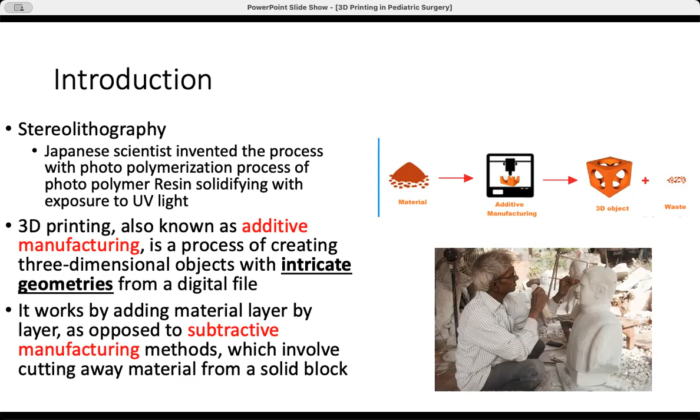So the basic principle is that you have some material, and then you add that material layer by layer and make a 3D object, so that there is a minimum amount of waste. This is exactly opposite to what a sculptor does while carving a sculpture, where he starts with a solid block of stone and then sculpts a statue out of it, which is called subtractive manufacturing. The material is cut away, and there is a lot of waste, and it's entirely dependent on the ability and skill of the sculptor making the statue. So for us to understand 3D printing, it is an additive manufacturing process where just one layer is built on top of the other.

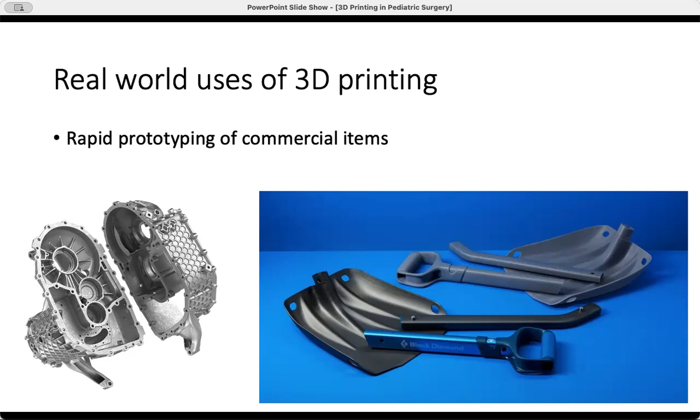The real world use of 3D printing is mostly done for rapid prototyping of commercial items. So whatever the car industries or mechanical industries are doing, whenever they are inventing a part of an automotive vehicle or some other manufacturing material, they will first make a prototype based on the CAD drawings, so they can see what all the problems are in the prototype. Then, after making the prototype and finding all the flaws, they will go on to develop the actual model with the actual material, rather than straight away printing with the actual material, which would be very expensive if they did that.

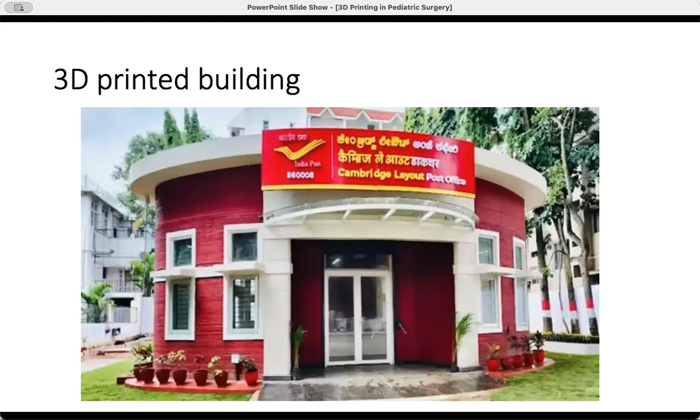Recently, you must have come across news that in Bangalore there was a post office built as a 3D printed building. What they did was take a large amount of concrete material, put it in software, designed a building, and then with large machines, they were able to print the walls and the rooms and the entire architecture into a building format which they can use. This is used for making buildings in a short span of time, maybe if something is needed as a makeshift area, like a camp, a refugee camp, or a makeshift hospital. This is being done very, very frequently now.

In medicine, 3D printing is being done with many uses. I will come to the specific pediatric surgery uses in the subsequent slides. These are just some of the examples.

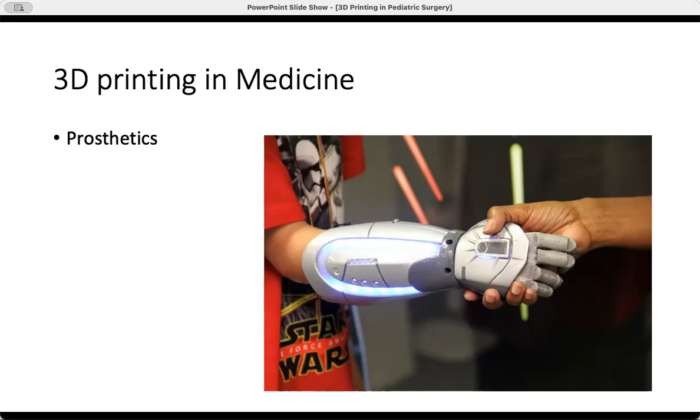This is a hand designed to look like a Star Wars hand, which was done for a child whose hand was amputated, and they designed a hand out of it. They made internal connections in a way so that he can move, he can have some finger movement or movement at the wrist, and the whole thing can act as a prosthetic.

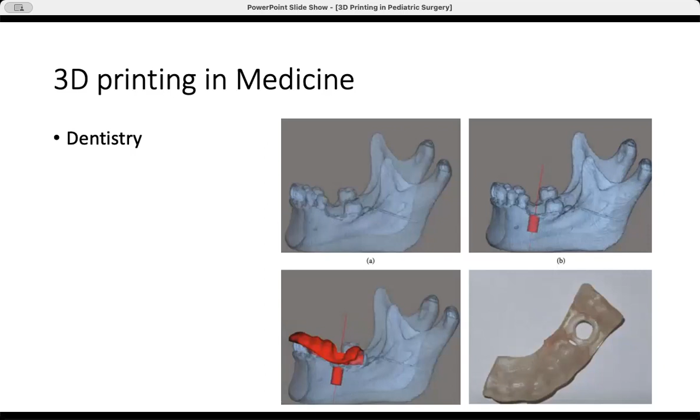Similarly, in medicine, dentistry is one of the biggest customers of 3D printing, because bones are very easy to reconstruct and print. So whatever defects you have to reconstruct as a surgeon, you can first prototype it as a material with a 3D scan, then make it patient-specific with all the measurements, and then print that material.

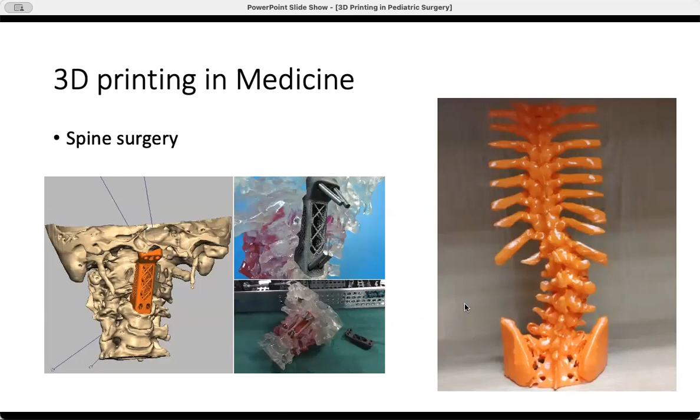Similarly, in spine surgery, this is a 3D model of a lumbar kyphoscoliosis. You can study the anatomy very clearly, study all the angulations, and then do your treatment planning. Similarly, in maxillofacial surgery, this is an artificial jaw created out of 3D printed material, and it acts as a prosthesis. So initially you make a prototype, and once the prototype fits everything and satisfies your requirement, you can make it out of a titanium material which can be implanted into the body and replace a particular part.

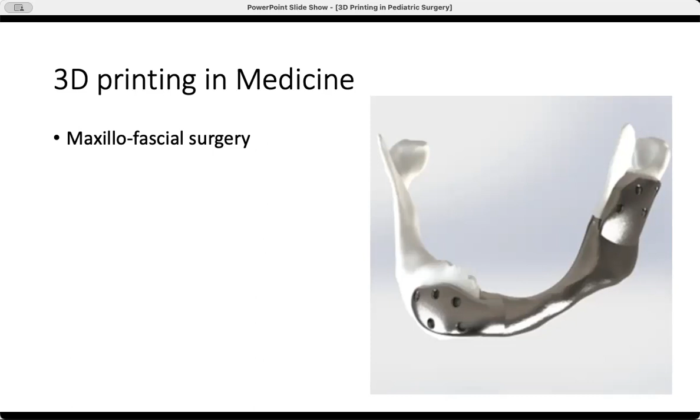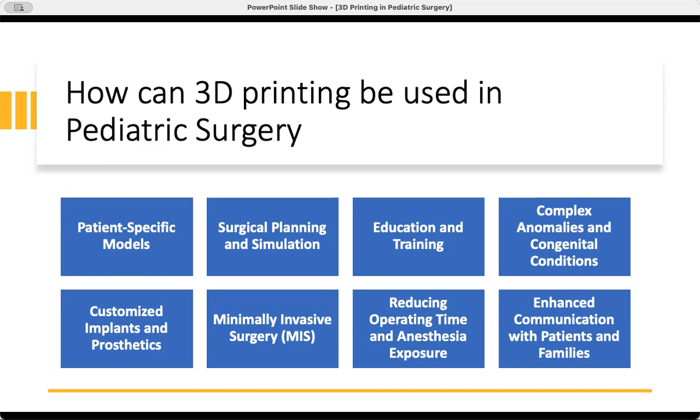You can design minimally invasive surgery instruments, and also have models designed for doing reconstruction inside. You can do simulations with the 3D printed material available to you, which will reduce the operating time and anesthesia exposure. And whatever model you have, you can use it for enhanced communication and better counseling with the parents, where you actually show the anomaly to the father or mother in the form of a model, and they are able to understand.

Now let us briefly touch upon the process of 3D printing. It is a bit technical, but once you get a hang of it, you will know how to do it. It starts in three forms, beginning as a DICOM image. Imagine there is a patient with hydroureteronephrosis, or a Wilms tumor, or a duplex kidney, where some imaging is available for this patient. It starts as a CT or MRI, and there is a DICOM image available to you. I will start with how to begin the 3D printing process when you have the DICOM images available, and we'll touch upon the remaining two.

When it is not a DICOM image, you just have some idea, or you want to scan some object, say a chair or an instrument, and then modify it with the use of 3D printing. So DICOM to 3D prints.

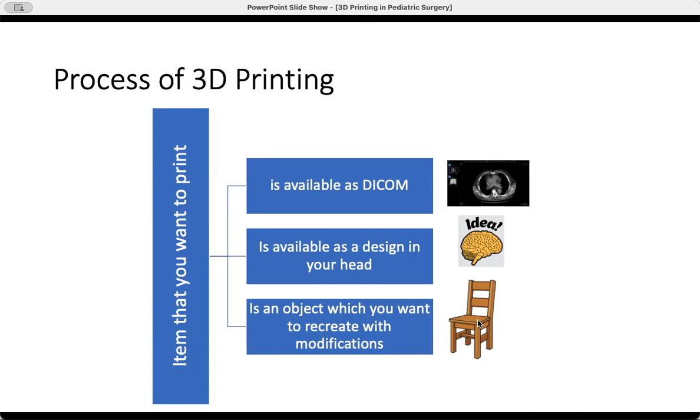So you first start with a CT or an MRI scan. There are softwares in between which convert the DICOM images into a printable file, which is called the STL file. And this file is then fed into a 3D printer. I will show you in the subsequent slides.

So first you obtain the DICOM images and then import into a slicer program. This program, which processes the DICOM images, is called a 3D slicer, and it creates the 3D models inside the software. All the slices of the DICOM images are added layer by layer, and then a 3D model is constructed. This is exported as an STL file, and then it is fed into the printing machine, and then it begins printing. I'll show you the actual process, and then there is some amount of post-processing involved.

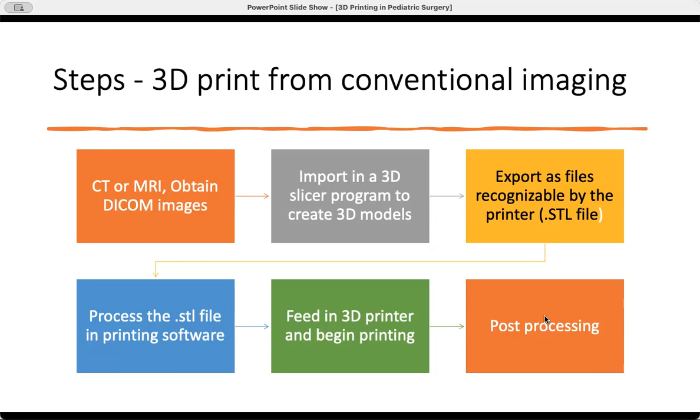So 3D Slicer is the first software which you will require, and you will require some sort of learning. It's a freely available program, a full-featured version available on the internet for a free download. And the software essentially marks the organ of interest in layers, so that a 3D image can be made, and then it is exported in the STL file format.

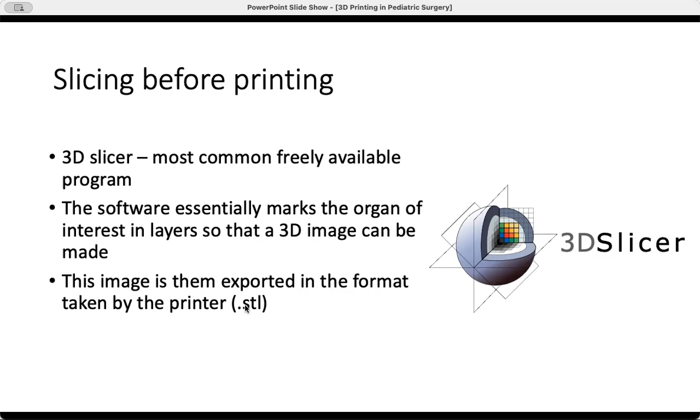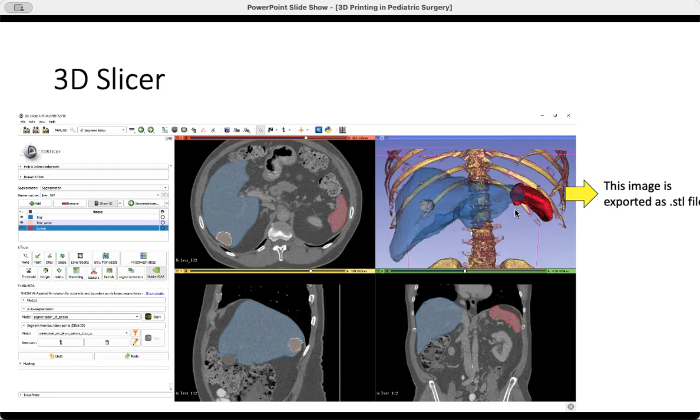STL stands for stereolithography. So this is one of the screenshots of a 3D Slicer program where we have imported an abdominal CT scan, and you can see that the liver is marked and some of the organs of interest are marked. There is some sort of lesion over here, and then the software gives you a reconstruction. Then this particular reconstructed image is exported as an STL file, and it is put into the printer for printing.

So once you have the file from the 3D Slicer, there is a second software. There are total 2 softwares involved in the entire 3D printing process. First is the 3D Slicer, which helps you process the DICOM images. And once the DICOM images are converted into an STL file, the STL files are fed into the 3D printing software.

So this is one of the images which I reconstructed. It is an image of a hydroureteronephrosis, a VUJ obstruction. You can see that the dilated tortuous ureter is there, and the hydronephrosis is present bilaterally. This has been extracted from those DICOM images by the 3D Slicer software and then fed into the software.

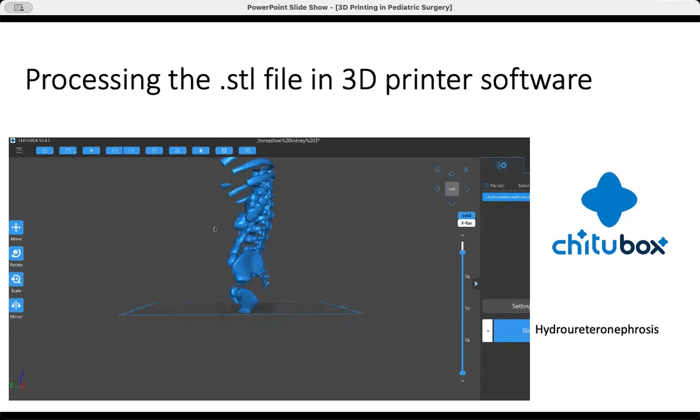This software is named ChituBox. It is also a freely available software available on internet. None of these softwares you have to pay for, it is available free for download on the internet. So you can customize the size, shape, and volume of the 3D printing model, and you can add or subtract any of the anatomical elements which may be there.

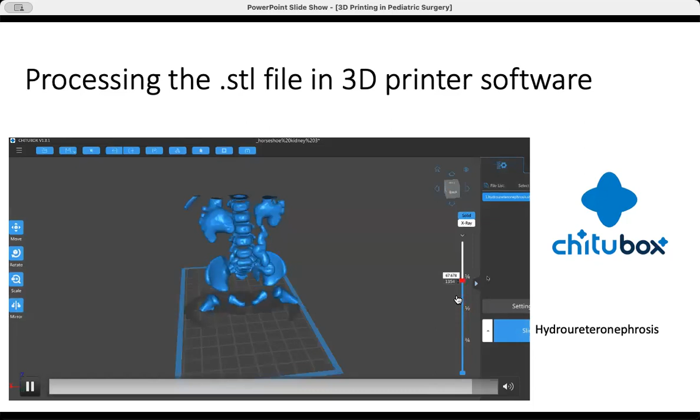So if I don't want to print this femur bone, I find it is extra and does not contribute to the model, I can just delete this part and just keep the hydronephrosis part. So what it is doing is slicing the image that has been reconstructed. It will be hollow from inside. It is better to keep it hollow, because otherwise the printing material required for the entire bulk would be very, very high. The resin is actually a very costly material.

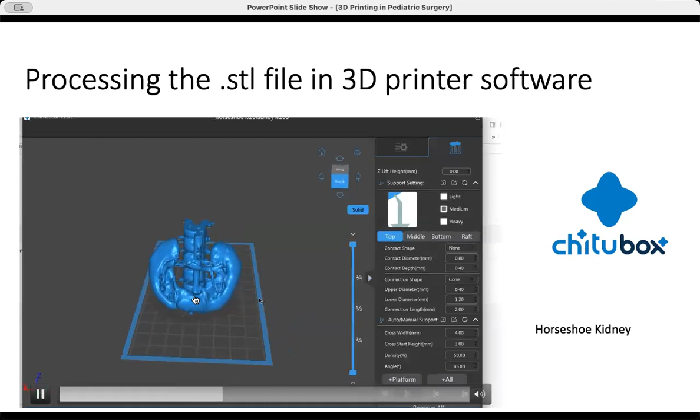So there is another example. This is a horseshoe kidney which we made. You can see that the model has been exported from the Slicer software, now coming into Chitubox. And then you are trying to place it on the plate, get it ready for printing. So you can see how you can have all the details of the complex anatomy of this region and the complex vasculature which is present over there. If you show this to a parent and try to explain horseshoe kidney, it will be very, very easy for you.

So again, this slicing is being done. The model is hollow from inside, and then it is ready to be put into the 3D printing machine for processing. So now your file is ready. You have done your thing in the slicing software, processed the DICOM, made the STL file. The STL file was put into the Chitubox software, and now it is ready.

So I took that image into a pen drive and fed it into this machine. This is the machine which I have currently with me right now. It's a resin printer. Resin printer means that the initial ink used for making that model or the material starts off as a liquid resin.

It's a polymer resin. There are other types of printers which use a filament instead of a liquid. This sort of hub will melt the filament and deposit it layer by layer on the plate to make the 3D model.

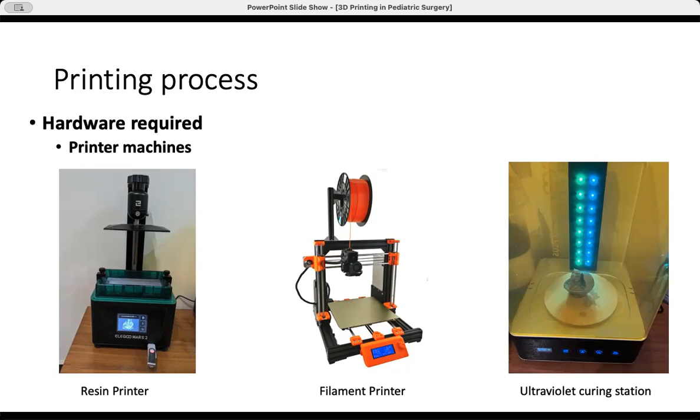This is the second machine you will require, because once this model is made, it needs to be cured - a sort of drying process where you shed off all the extra liquid that hangs onto the material. So this is the machine which I have.

You can see this is a tub where the liquid resin is there. This is quite an expensive material. This is the build plate to which the model will stick underneath, and this is the console where the model has been fed.

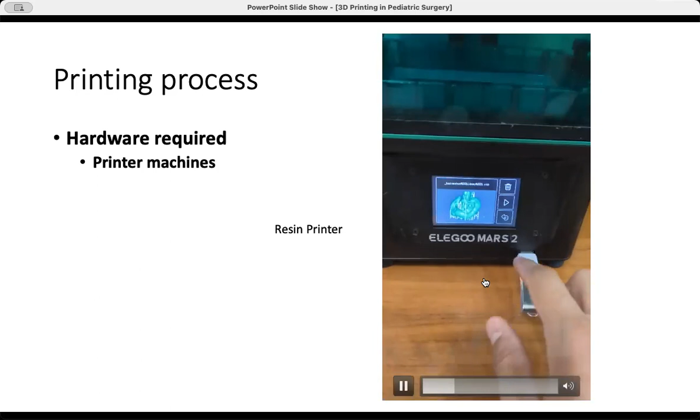Once it has to be cured, there is a 405 nanometer ultraviolet light thrown from below which solidifies the resin material, and it should not be exposed to your eyes. So this is something you have to keep away from the reach of children.

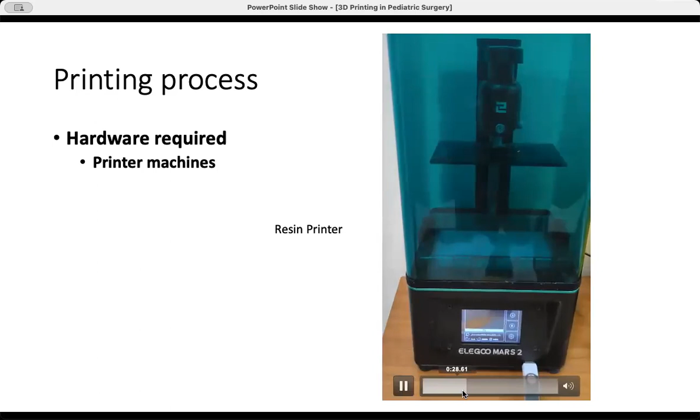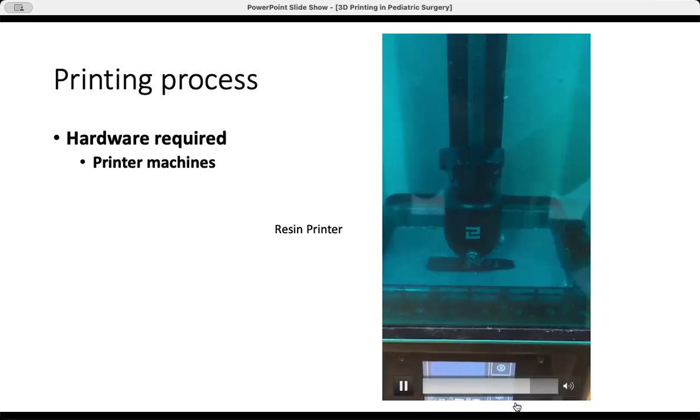Once the model has been fed, you can see this build plate will go and dip into the liquid, and then gradually it will build up the model. It's sort of a hanging upside down kind of model.

So I have started the process. This is a time lapse. It takes a very long time, almost 3 to 4 hours, depending upon the size of the printed model.

You can see it is printing - these are layers which you are seeing. With every layer, it exposes in a flash with the ultraviolet light from below and solidifies. Then the next layer is flashed, and all the layers keep sticking one by one on top of the other.

It is almost a 4-hour process which is squeezed here, and gradually the plate keeps rising up as more and more layers are being printed. You can see the plate coming up, and the model is slightly visible, hanging upside down.

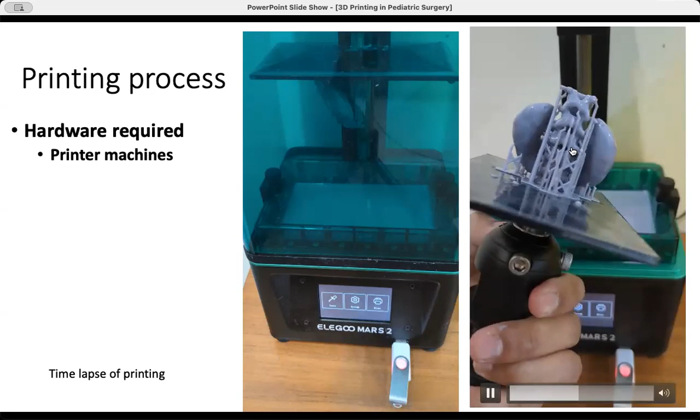So this is the model which has been built onto the plate. It will stick onto the plate, and once the plate is removed from the machine, this is what it looks like. You can see these support structures which are used to support the printing process - this is that same horseshoe kidney which I printed last week.

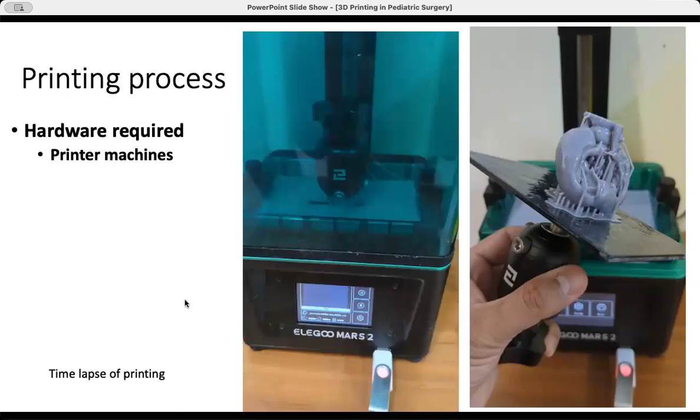Now, once this model is printed, it is wet, filled with liquid, and you cannot touch this liquid. Actually, this is a very toxic liquid to skin. So be careful to wear your gloves and keep it away from the reach of children.

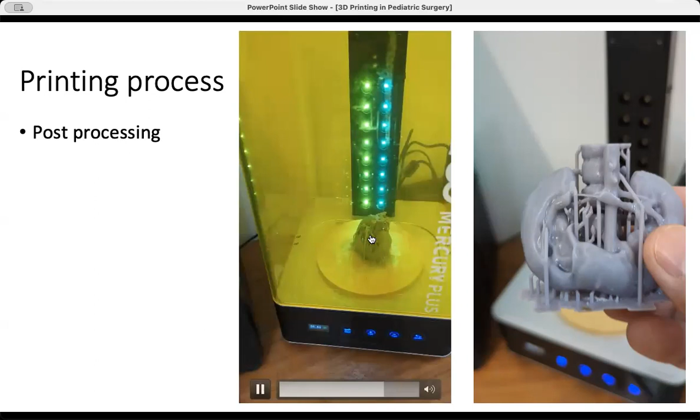So this is an ultraviolet curing station where the ultraviolet light is thrown onto this object. It takes around 5 to 10 minutes of this curing process, and all the liquid will be solidified, and all the material used will become solid, and all the contact toxicity will be reduced to the minimum.

So this is the final thing. You can see now we can remove the supports - these small supports which are easy to peel off from your model. Once you remove all of them, you will be able to see the actual model.

You have to be very, very careful to remove so that you don't cut the actual blood vessel or any other structure which you want to be there.

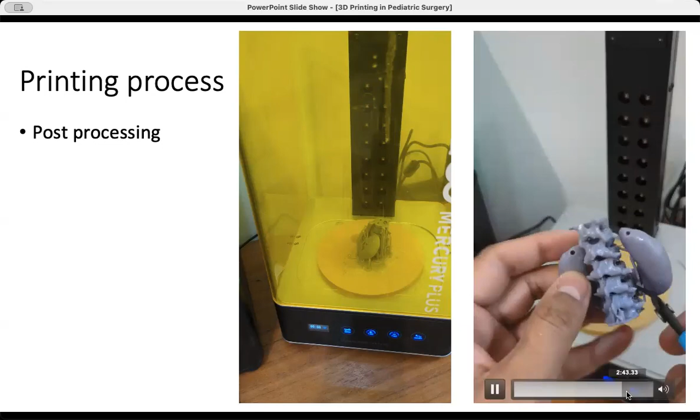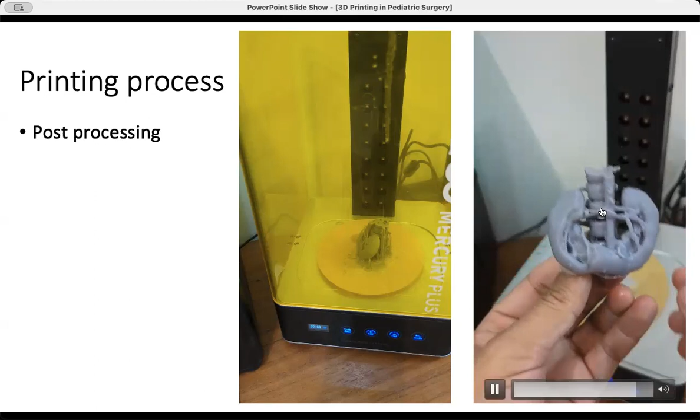So now you can see this model is ready. It's a horseshoe kidney model with the vertebra column and the aorta, the vessels which are seen. This will be exactly like the patient must be having as actual anatomy. So this is just an example to show how 3D printing can replicate the actual anatomy.

I just scanned, with the iPhone camera, you can scan a person and take a 360-degree video, and feed it into the software. It will give you a 3D model which you can print. This helped me learn the entire pre-processing, software processing, and post-processing, and to learn the printing process. Now let us come to the potential applications of whatever you can do with 3D printing.

Once you know how to do the process, because most of the time, if you don't know, you will have to depend on a third party, an engineering collaborator, or another technical person to do it for you. But I always believe in doing everything in-house.

As I said, this model can be used for education and training for medical students and residents. At the same time, it can be used for communication with patients and families.

You can imagine how much easier it will be if you're trying to explain a duplex kidney or a hydronephrosis, you can actually show them.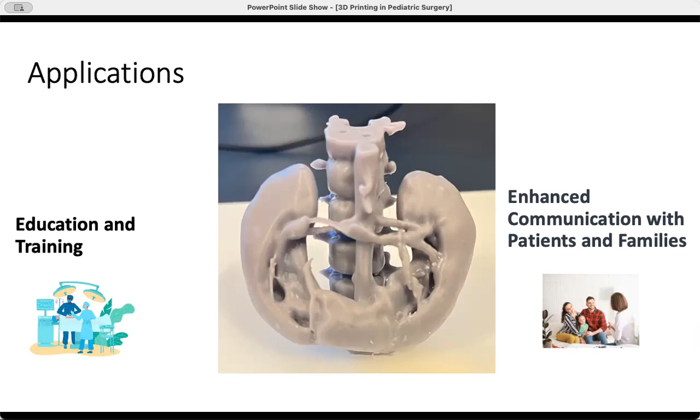All the complex anomalies and congenital conditions can be replicated into a 3D model. You can see here a duplex kidney where you can see two ureters and the duplex system.

Nowadays, even the antenatal ultrasounds—the 3D, 4D ultrasounds being done in various centers—they actually offer you an image of the baby with a 3D printed model. So you can see what your baby would look like even before the baby is born.

The potential uses I could see are that if there is a cleft lip, cleft palate deformity, limb deformity, or any other syndromic deformity in the baby, it can be very well seen and shown to the family that the child has this. So these are some of the applications.

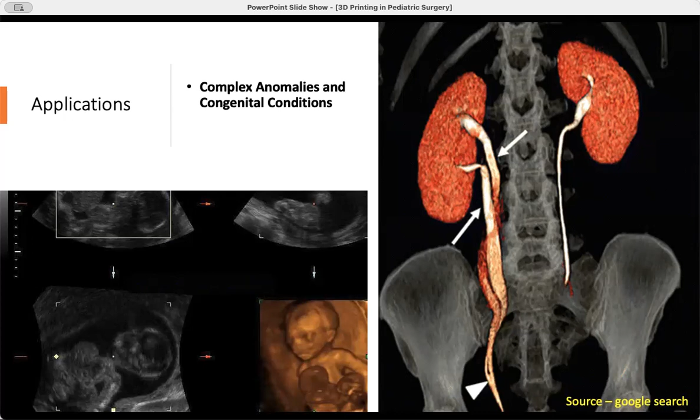There are a lot of prosthetic applications present in the literature. This is one of the reports I saw—a baby with anotia, meaning no ear, and many other congenital anomalies were present.

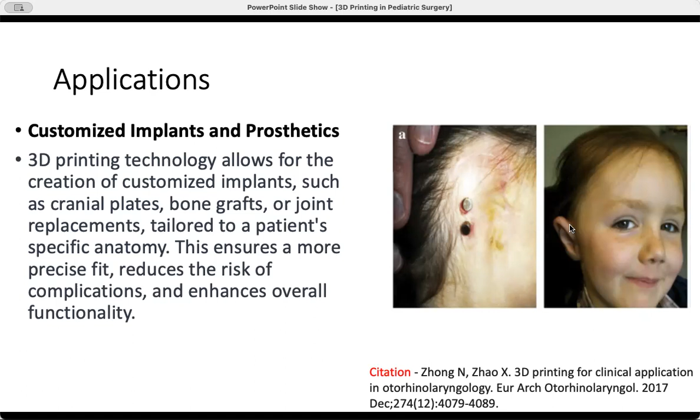What they did is scan her other ear, which was normal, and then created an exact replica ear out of a silicone material made through 3D printing. So this is one of the potential uses.

We see a lot of tumors—Wilms tumor or liver tumors, solid visceral tumors—in pediatric surgical practice. This is a report where a bilateral Wilms tumor was studied.

A 3D printed model was made, and they virtually dissected it within the software to know where a blood vessel is going to come, or where a vein or calyx is going to come. They were precisely guided by the 3D models they made.

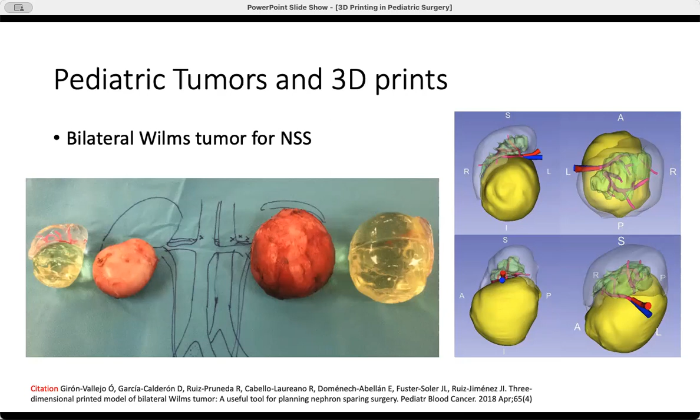So this is the resected specimen. The yellow part is the tumor which was 3D printed, and this is the full model of the kidney with the tumor. You can imagine that if you're planning a nephron sparing surgery in these patients, an actual model will give the surgeon a clear mental image, making him more confident while doing these surgeries.

Liver and hepatobiliary planning—if you see this software reconstruction of liver tumors, they are amazing. They show you the anatomy in such detail that it's very difficult to see on CT axial images, on a CT plate, or on a DICOM system.

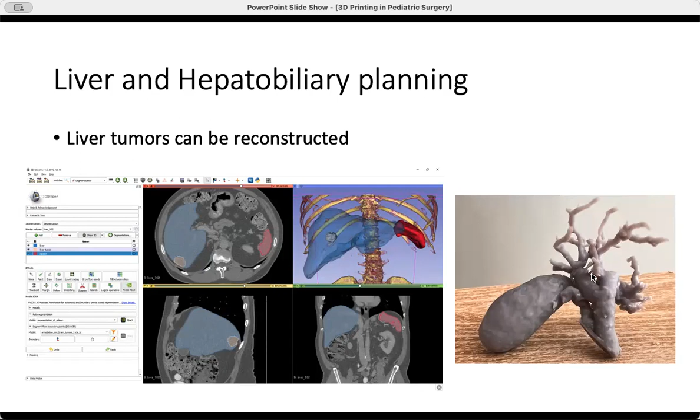This is one of the models I made with an MRCP image. I actually have it with me right now, if you can see this. This is an MRCP model where you can see the gallbladder and the entire biliary tree. So this is the picture for that material. It's really amazing what these software reconstructions can do.

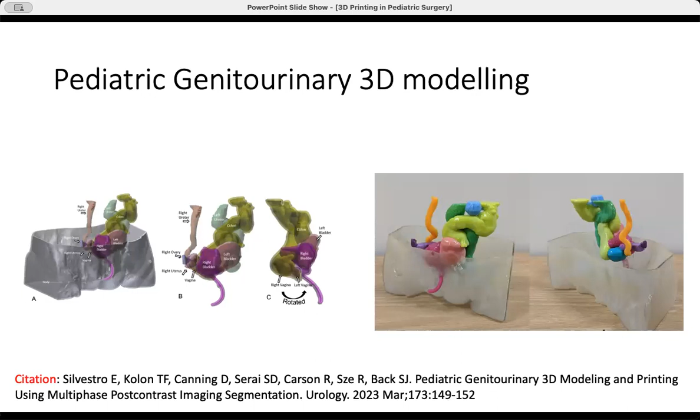Pediatric genitourinary models can be created. We know cloacal anomalies are very complex. This 3D reconstruction was done using an MRI scan of a patient with cloaca, and all the anatomy was replicated and reconstructed, then later utilized for the surgical reconstruction done for these patients.

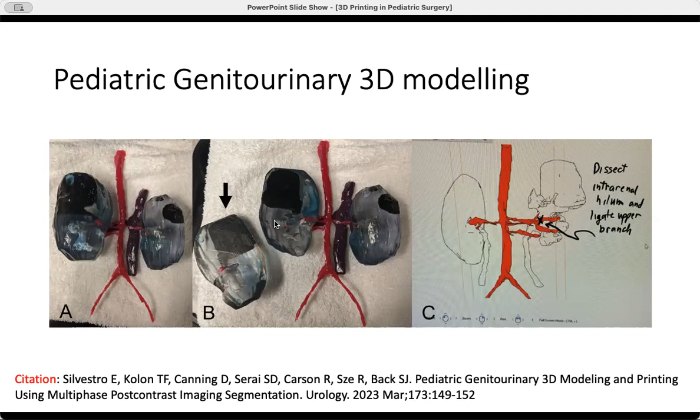Similarly, the same for tumors—the black areas represent the tumor. This is from the same paper, and it was used for surgical planning.

Pediatric cardiac models are very common—you will find so many reports of pediatric cardiac congenital anomalies being guided by 3D models, helping to understand the anatomy in relation to the actual anatomy present.

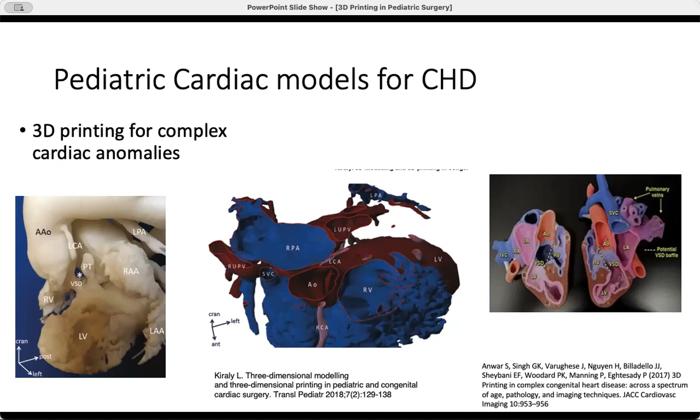And then they are replicated when the surgical correction is done for cardiac complexity patients. This is a model of a tetralogy of Fallot which is replicated, and then the surgical planning is done on the model itself. So it's a kind of a dry run of the actual process you would be doing in the theater.

So this was about the DICOM images. You started with a DICOM image, then processed it, printed it, and did the planning, or the entire use case scenario that I described.

Now, what if there is an instrument you want to design, it is there in their head. Suppose, for example, I want to design a different kind of Maryland forceps. So what can I use 3D printing for that? Yes, absolutely. So all these elements you first design in a computer-aided design.

You can even make a handmade drawing on a piece of paper, scan it, and feed it into a computer design software or CAD software. One commonly used one is called Autodesk, and it will convert that handmade drawing into a computer sketch. From there, you can alter, modify, straighten the lines, do the whole designing within that software, and then feed it into a 3D printer.

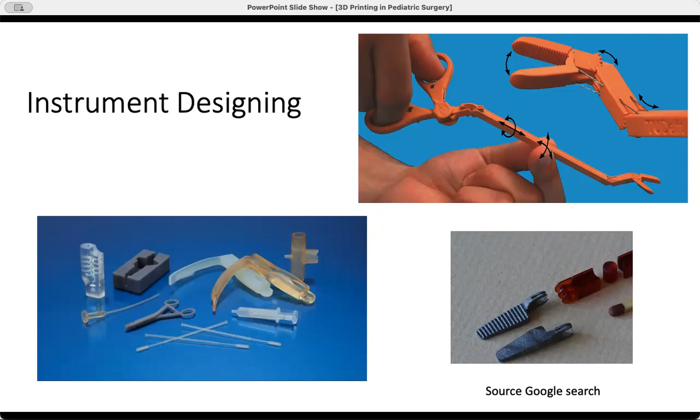And then once they see and rectify all the flaws in that design, they will go on to make it commercially print with the actual material.

So there are some other uses of 3D printing also, such as tissue engineering, where you provide scaffolds and then actual tissue is grown onto those scaffolds, and drug bioprinting. I have not included that in this presentation because it is quite extensive and out of my expertise area. So I've excluded that, but for the 3D printing process, I have tried to explain how you do it.

Although it is a technical process, it is not hard to learn. All you have to do is learn by playing around with the 3D Slicer software and the Cura software or something similar, and then get the hardware to print that machine.

The cost of that hardware machine is not very high these days; it has significantly come down. The ones commonly available can be purchased within say 50,000-60,000 rupees, and an additional 5,000-6,000 rupees is required for the raw material needed for the 3D printing. It's a method of bringing your ideas to a prototype level.

We get so many ideas while working with our patients and with all the instruments that we have. This instrument should be modified in this way, that should be modified in this way. But to bring it out of your head and put it onto the computer and make a prototype, 3D printing is the tool you will require to do that.

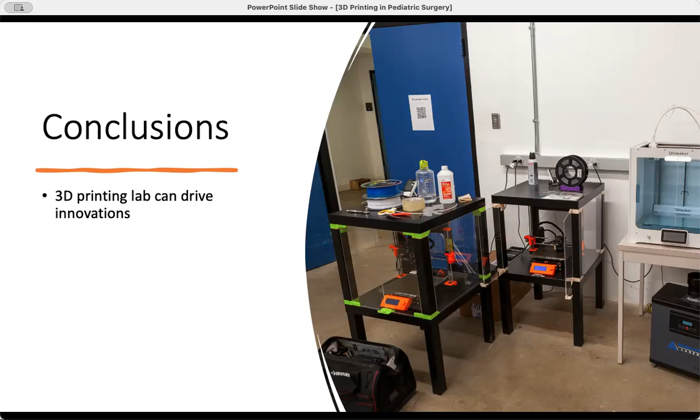So I hope I was able to give a short introduction on the field of 3D printing with its specific applications in pediatric surgery. And I hope it was interesting to the listening audience. Thank you so much.